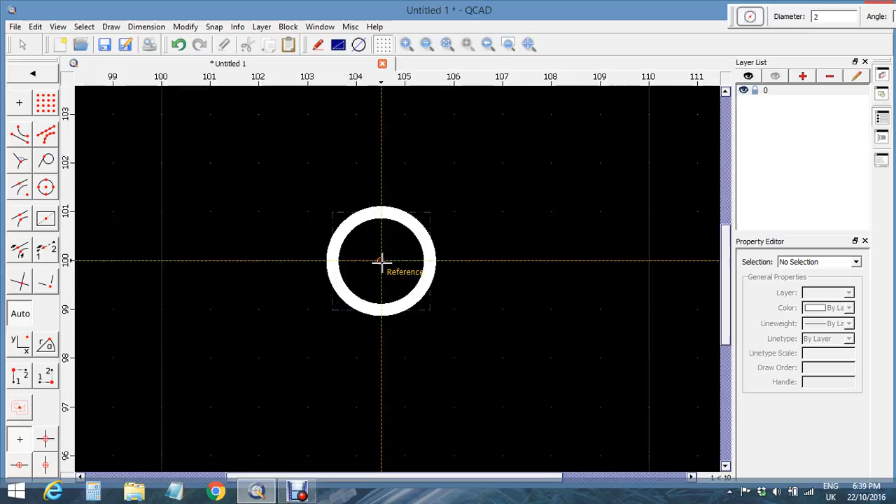Now here's our thing here. Okay, so this being 1104 motor, the spacing is at 9mm apart, so that's 4.5, so that's 4mm and that's 5mm from, say we call this the center, 4.5, so zoom in here and we go to 4.5mm. Okay, and we can do the same here if we want. 1, 2, 3, 4.5. It's going to be somewhere around here, about there.

Okay, so let's just double check that. So this button up here on the top left, back button, takes us back to our tools, back to start. Now this is a ruler. We want to measure, and we're not measuring area, these are for measuring area. This is for measuring distances, various ways.

If you hover over one, it'll tell you what it's doing. Okay, and it'll also show, see how it says here, distance to entity. That means you can just press I and N on your keyboard and it'll take you straight to that function, and you don't have to use these tool buttons at all. I'll use them so that you know where they are if you need them.

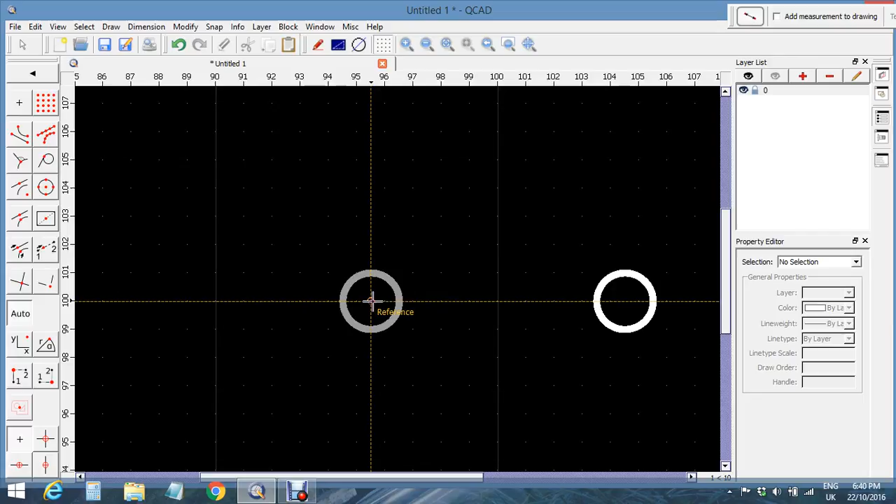Okay, so I've got 9mm between those two, so that's fine. Now I need 2 more holes up and down. I can either draw new ones, or I can show you a technique that we'll use later, so I might as well do it now.

I'm going to select these two. To select something, see how when I hover the mouse near that circle it goes darker. That means if I left click it will become selected. You have to select an item or an object to be able to move it or do something with it, or copy it or rotate it.

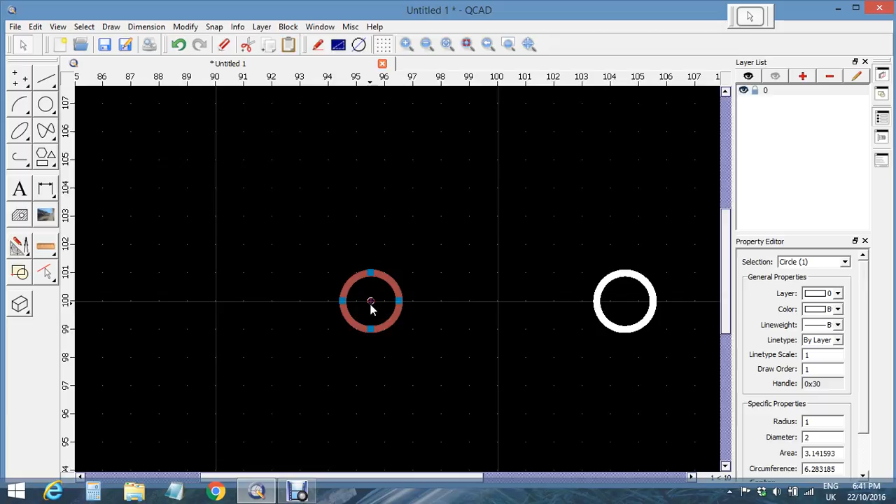Now I want to select both these and rotate them 90 degrees and put them back up here, so we've got 4 motor holes. Now I can select it by dragging, left click and drag. I can select them both, is one method. Now I want to do something with these two.

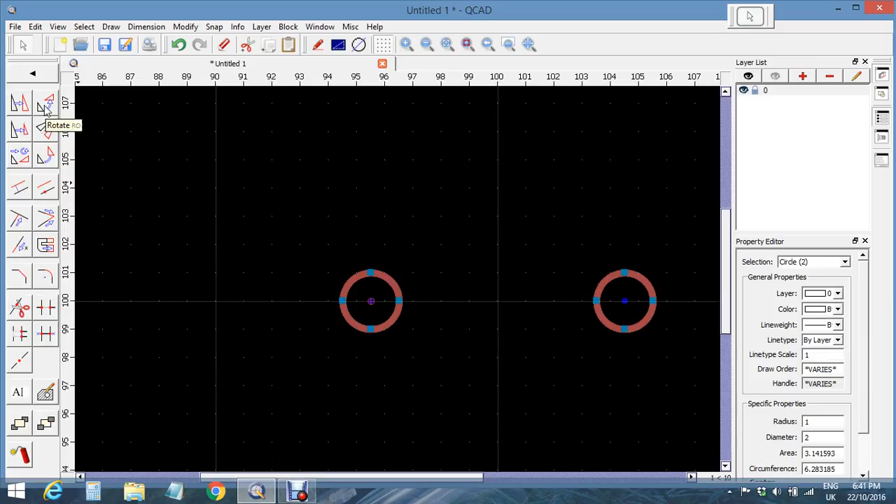I want to modify, they call it modification tools. So we go to modification tools and I want to rotate these. Now I could type RO into the keyboard, or I can do it the slow way here. Rotate is used a lot, so need to get a handle on it.

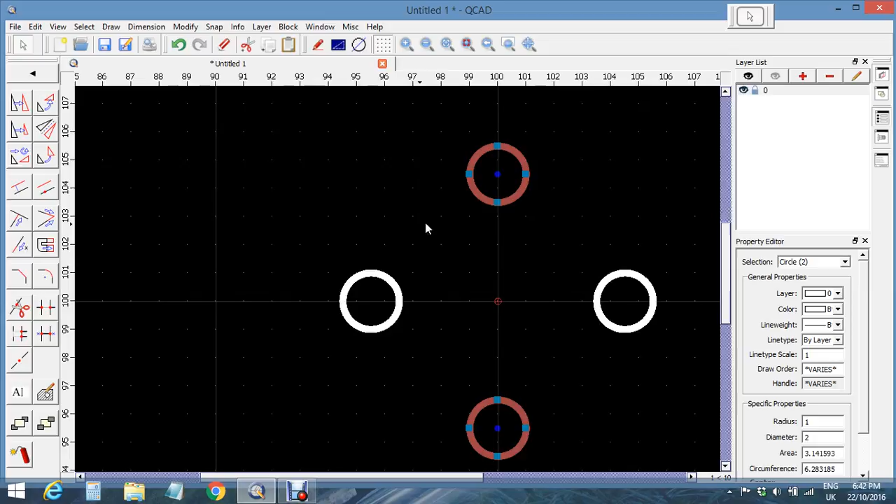It's asking me what point do I want to rotate these two selected items, and I'm going to select here. So we rotate them around there. Now the angle is 90 degrees counterclockwise for a positive angle, and I want to keep the original, not delete the original. Okay, I'll show you what happens. So we've kept the original and we've got the new rotated. So now we've got actually the holes for the motor.

Now I need another circle, so we go back on the toolbar and select circle. We want a circle of diameter around 4 mil. I drop that in the middle by left clicking. Now this will keep dropping circles everywhere as I left click.

To get out of this mode, you right click and it'll kill that mode. I can get rid of those two circles by using undo. So if you get into any drawing mode, you can usually right click to exit, or unselect with a left click. I select with a left click, unselect with a left click. If I'm in a mode like circle, to get back to normal drawing, you have to right click and then you're free of it.

If I wanted to change that center hole, in the property editor I could make it whatever size I want, say 3.8, and then click or enter and it'll change that circle. It'll give you the coordinates of the center point, and you can change them and it'll move the circle. You can do that with a line or anything.

Okay, so I just moved it 10 to the left. Now I can undo that and put it back.

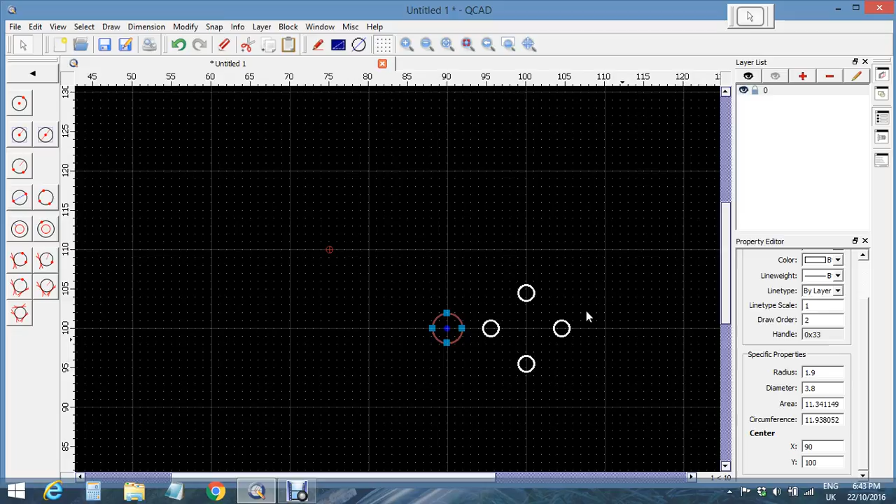There's our motor base. Now you can see that the arm would be at 45 degrees, which is correct, but I want to draw the arm vertical so that I can get it symmetrical. It's easier to draw vertical, so I select all that.

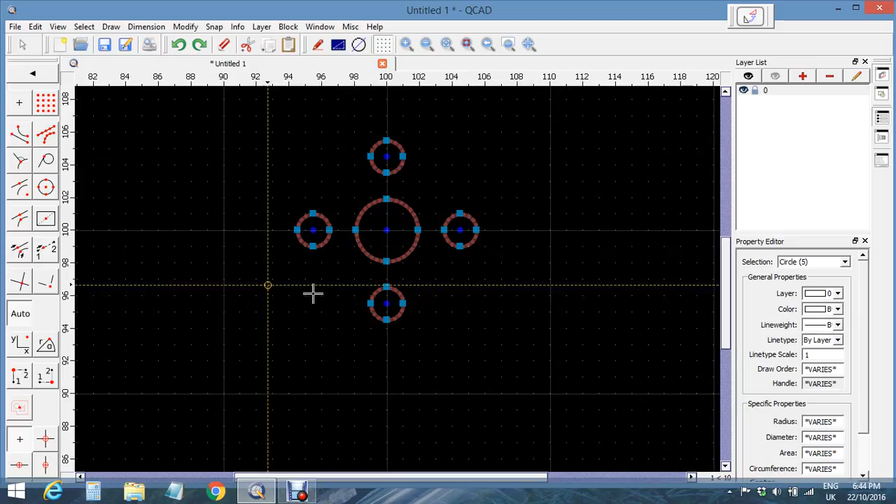And we rotate again. So we go to our modification tools, rotate button. Now the axis I want to rotate it around is right in the middle, so I click there and I want to do 45 degrees.

Click OK, and I made a mistake there in that I should have deleted the original, so we go back and we do it again. Rotate 45, but we delete the original, otherwise it gets cluttered.

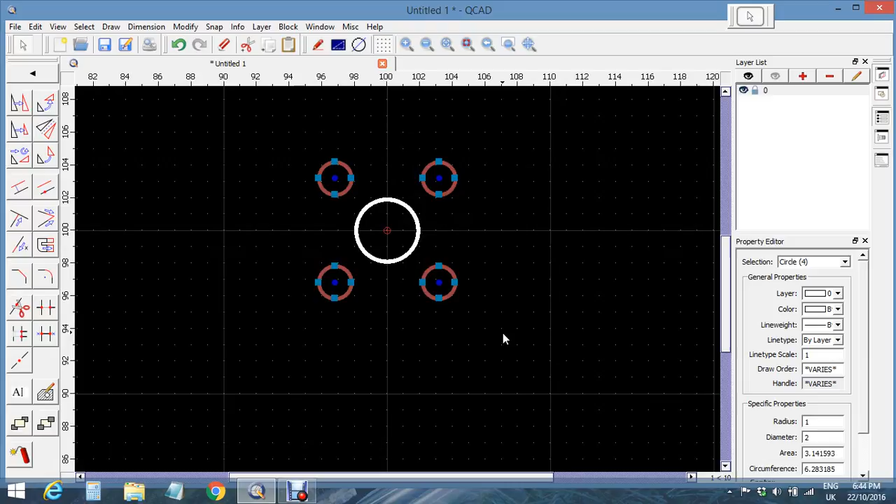Okay, now what width are we going to make the arms? Let's say 8 mil wide for the arms, 8 and 3 mil thick.

Go to the back button because I want to draw a line. You can do arcs, circles, ellipses, squiggly lines, spline tools it's called. Text, if you want to put a text box. I don't know what these do yet.

That's the modification tool. That's to create a block. I don't do that much, but you can. I'll show you how that works now, otherwise I'll forget. It's probably easier when you're starting to make blocks.

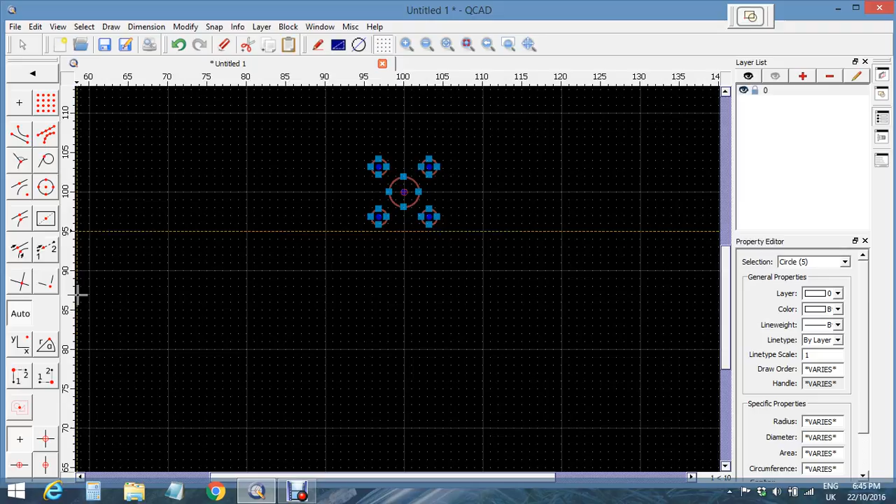We want to make this as one entity instead of 5 different things so that we can move it around later. So we create the block now. The next click that I do is where we handle this block. How do we grab it and move it? I want it to be in the center, so I'll do that, and it's going to be called block 1, or I could call it engine mount or whatever I want, and go OK.

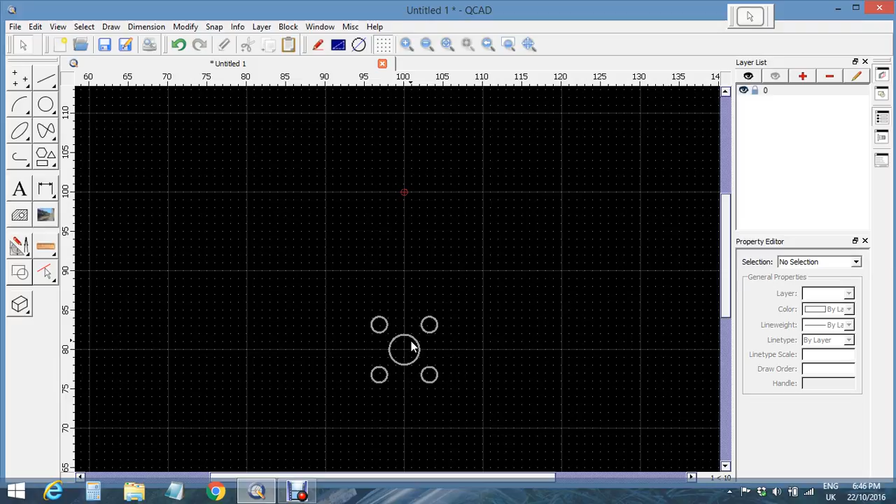So that is now one entity, and I can drag that around and drop it wherever I want, or I can spin it, oops, left click to drop it, whatever we like. So it just makes manipulation of groups of elements a lot easier.

Now we can undo that by selecting it, modify, explode. Okay, and we're back to where we started. Now it's all individual bits.

Doing block selections or making into a block like that is good also for making sure that none of the elements become disoriented or out of spec with the others, like moved or something.

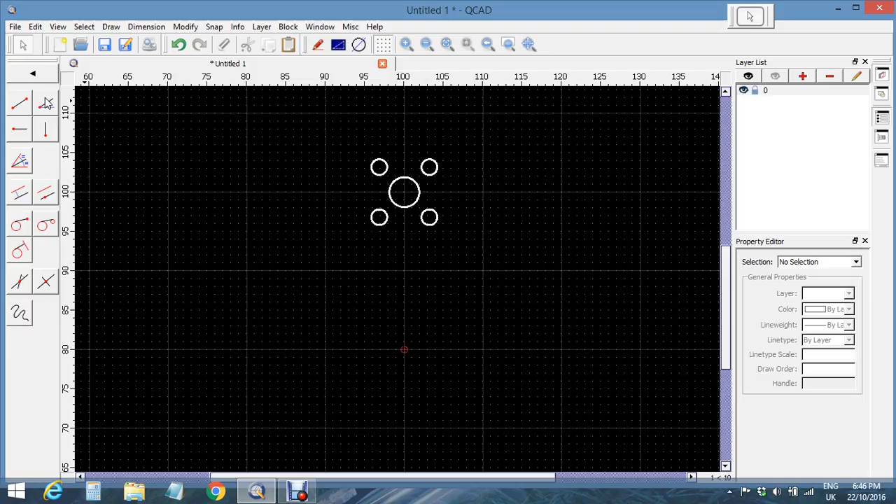Okay, now we're going to draw some arm sides. This is a line tool, and it's asking me how I want to draw this line. Is it a line from 2 points? Yes it is. So we're going to make it 8mm wide, so we say start here, and I'm starting at the top and working down. Now I did my first click to start it and a second click, and now I've got this line hanging off here.

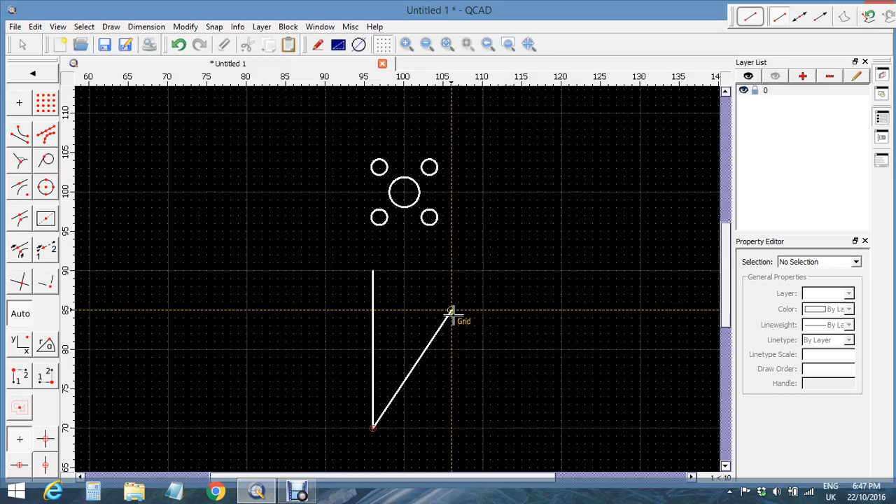You have to get rid of that by right clicking. Okay, now I can do another line. So a left mouse click to start and a left mouse click to finish and a right click. Now I'm still in line drawing mode, so it assumes I want to keep drawing until I press the right mouse button. So we click the right mouse button and we're out of there.

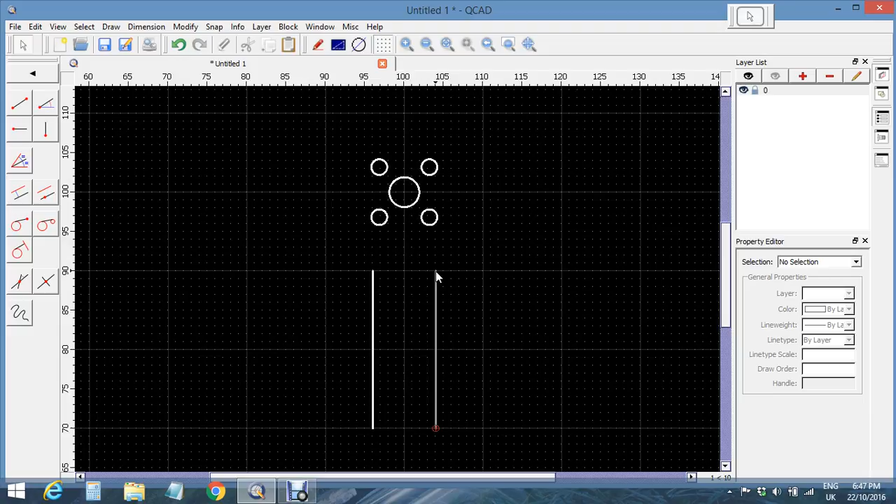Now the reason I started these lines from the top and down is so that I can change the length of them later, and this end will stay here and this end will extend. If I'd started at the bottom, when I try to make the arm longer, this end will shoot up.

I'll show you. Total length is 20. Say we decide later we want it 30, okay? I'll do that and you'll see the extra length comes out the bottom instead of the top. So let's undo that.

It gives you the start and end points, so you can also manipulate a line by just typing in different values here, and your length obviously, and your angle. That's 270 from here, from there's 0, so that's 90, 180, 270.

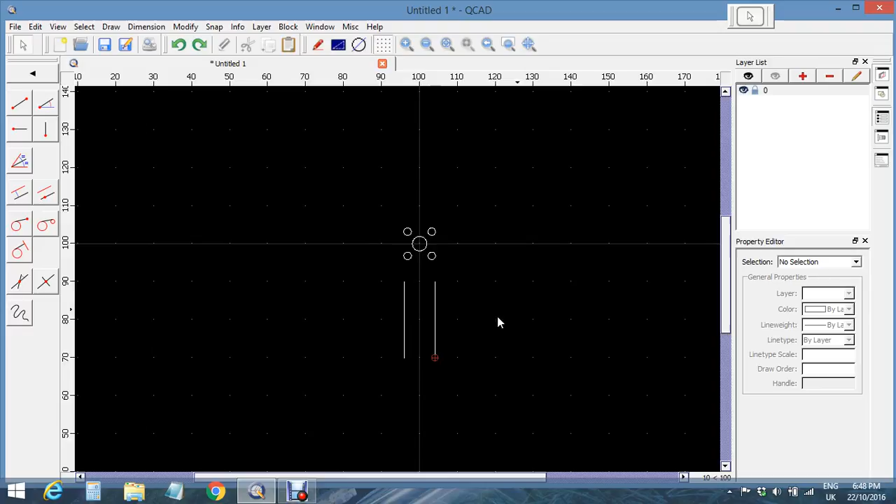Okay, I haven't got a timer going, so I've got no idea how long this is taking, but anyway, I don't want it to drag out, but I've got to go over the basics, I suppose.

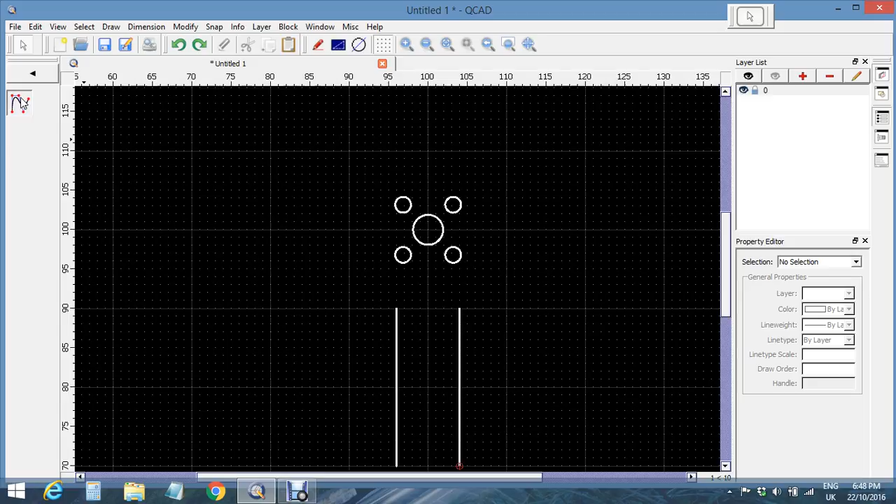So next I want to put something around here, so this is where I use the spline tool. There's only one available, and I'm just going to draw half of it because that's easier than doing the whole lot.

I'm just putting a few random dots around here, not too many. The less you can use and get away with, the better.

But now to manipulate that line, I select it, and then I can drag these little blue boxes around to put it wherever I want to, and it sort of develops curves like that.

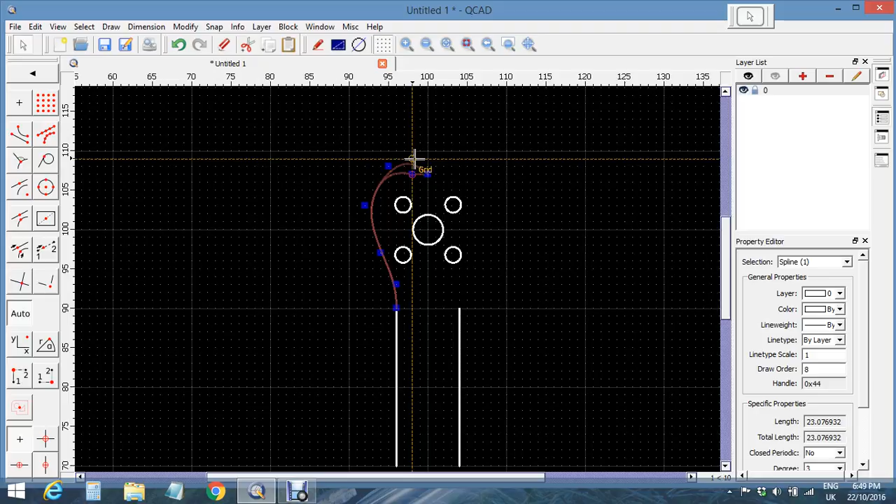So to move one of these boxes, I hover over till I get that white outline on it, then I left click and drag. Once I've got a handle on it, I can let go of the mouse and just put it wherever I want to put it with another left mouse click.

Now I've got no idea what's going on here with the motor, so it'd be nice to have an outline of the motor so we know how big to make this and what shape and where we're going.

So over here at the top right hand side we can add a layer, so we just hit that plus button and we have a layer, and I'm going to call it motor, and I'll set the colour to dark yellow.

Okay, now if I highlight motor, I'll be on the motor layer. I can turn the layer on and off with that eye button. If I want to draw here on the 0 layer, which is the layer that's used to cut the frame, click on there.

So I want to draw a motor, so oops, what did I do? Okay, there we go back.

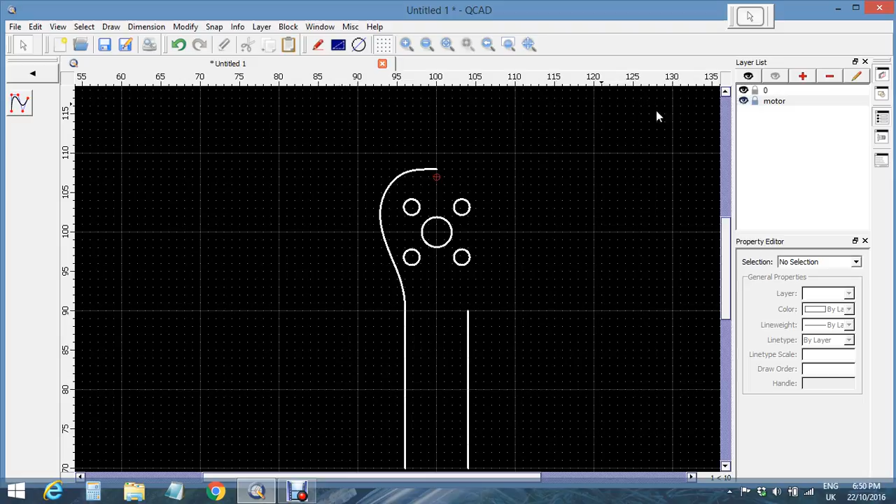We want to draw a circle. I think the 1104 is 14mm diameter, so I'm going to drop that on there and right click to get out of that.

Now we can turn that motor on and off. You can have different layers to help with the drawing.

So we want at least 2mm past the motor and something that's roughly round, and we need a bit of meat out here.

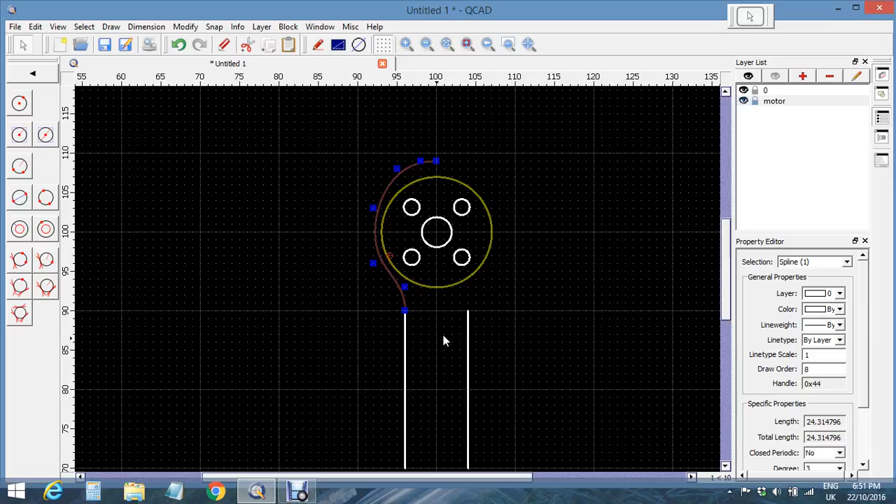I want to move this line down, both these lines down. So how to move a line, how to modify a line: if you hover over the little blue end and grab hold of it, you can move it around wherever you want, change the length.

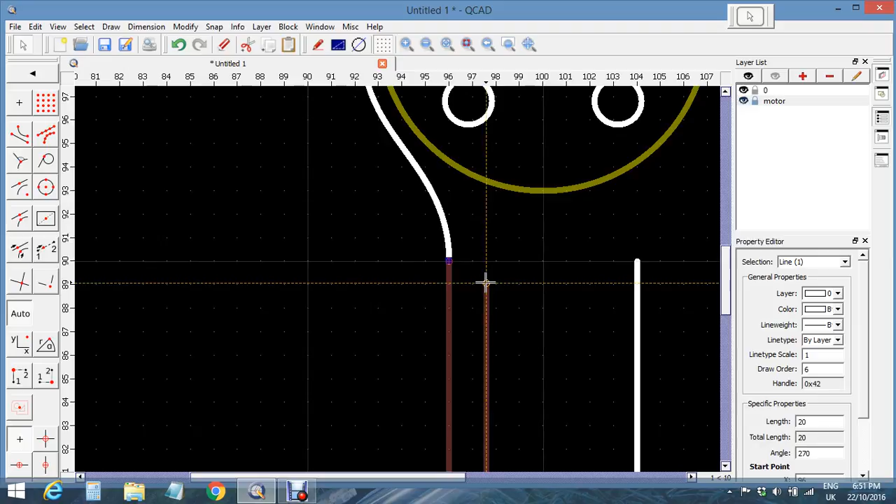Or the other way is you click anywhere on it, you hit the left button and move. Now I've got the whole line intact with its original length, and we'll just bring it down to say here. And we'll do the same for this.

So this will just give a much better taper. I want that around there, it's not... I've lost the selection.

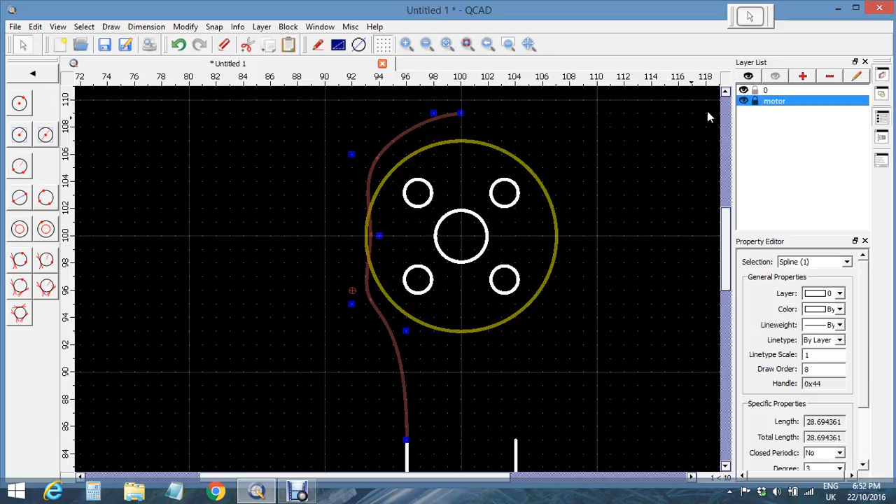I'm gonna hide the motor. I want a bit of meat around through here because this is a high stressed area when you crash on the tip. So something like that, say.

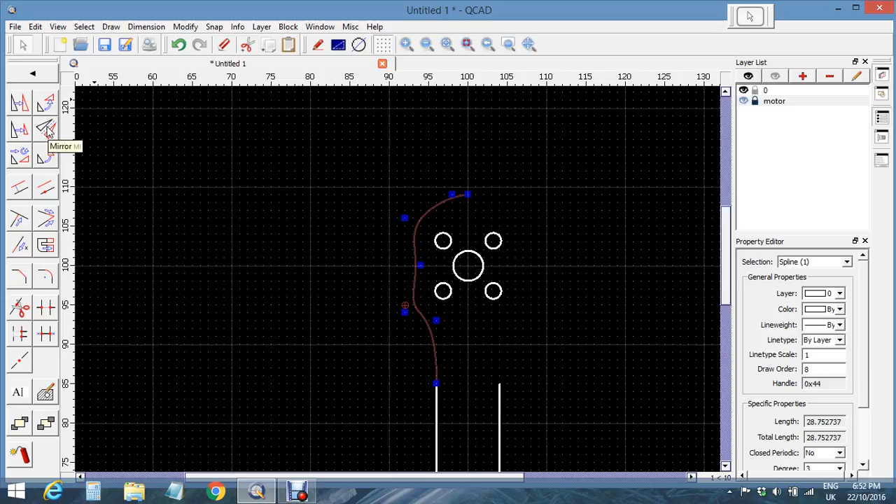So now we do a mirror image. So we go back, modification tools, mirror. Or you can type MI on the keyboard now.

It's asking me for a line, which is the mirror, where the axis for the mirror. So I'm going to, you can see how that works, perhaps. I want it mirrored vertically, so we do that and we keep the original.

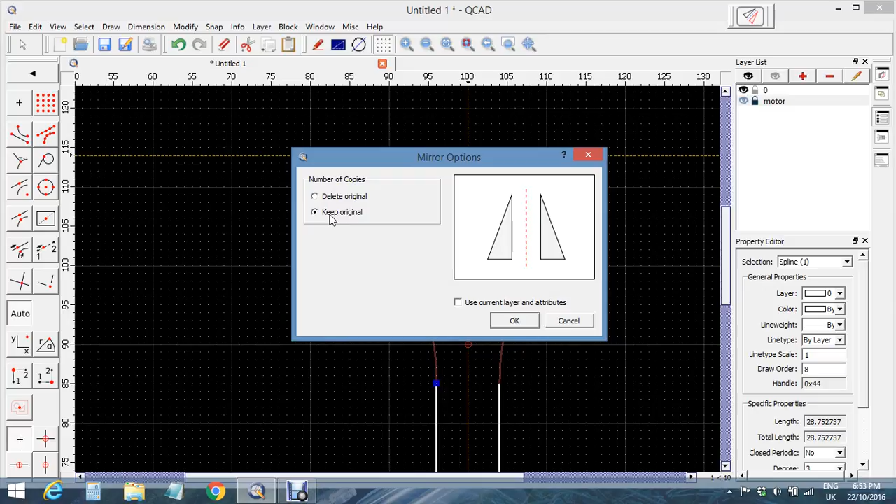So now we've got our, if you didn't like that shape, you would just delete the right hand side, modify the left, or you can modify them together. If I hold the shift button down on the keyboard and right click this, I can have them both selected at the same time. So if I make changes to one side, I can make changes to the other side.

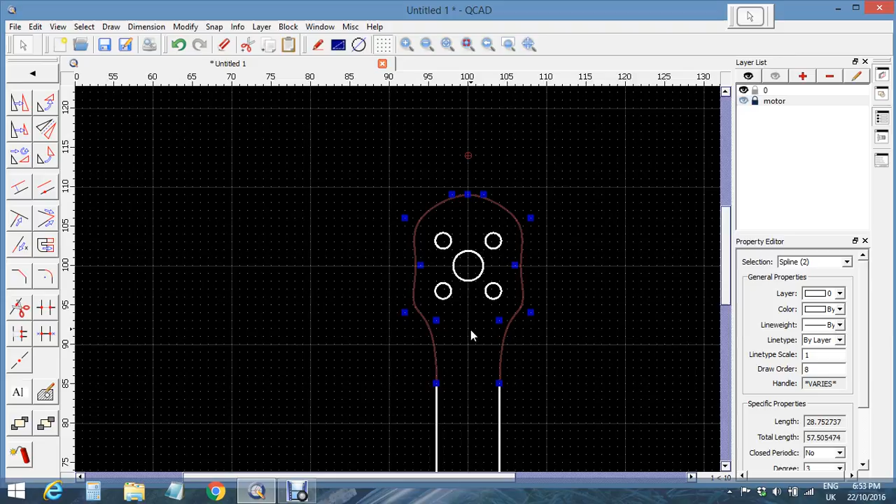If there's going to be lots of changes, I'll just change one side and mirror image it over to the other side. So let's say we're happy with that then.

So we select it and rotate. It doesn't really matter at this stage where we rotate it, but I'll use that, and I want to go 45 degrees, and I want to delete the original.

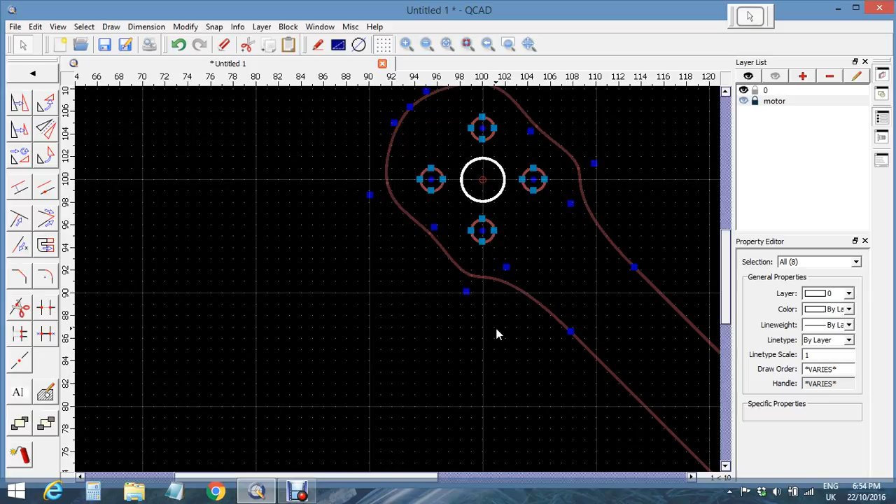So there we have it. Now I want to move it. Oh, I forgot something, let's undo that.

I forgot. Now let's assume that this is going to be the center of the quad, and we want a 135mm quad, and half of 135 is 67.5.

So this is how we set the diagonal measurement, 67.5. So I want to move this. It's a bit hard to explain, I'll show you and then you'll probably understand.

Now see how none of these buttons are coming up on the left hand side? That's because nothing is selected, so I have to select that. Then these buttons come alive. I want to move this, so I'm just going to move it.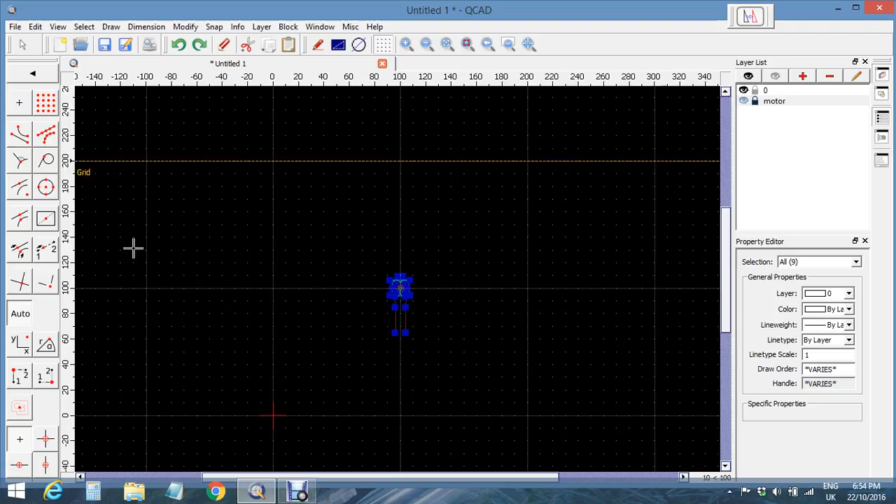And I'm going to grab it by the center hole here because this is where I want to go 67.5 millimeters from what's going to be the center of the frame. So 10, 20, 30, no, I'm not going to make it.

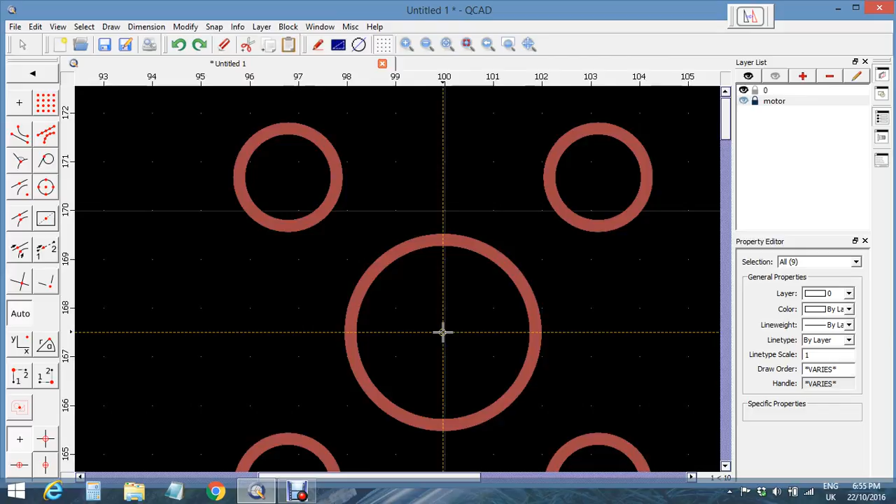That'll be 7, that'll be 70, so a bit under there. Here's our 67, so 67.5 is going to be around here, and as we scroll in we get more finer resolution.

So we want to delete the original and go OK. Now I've made a mistake here. I'm trying to draw on the 0 layer, but I've got the motor layer set up, so I don't know what's going on there.

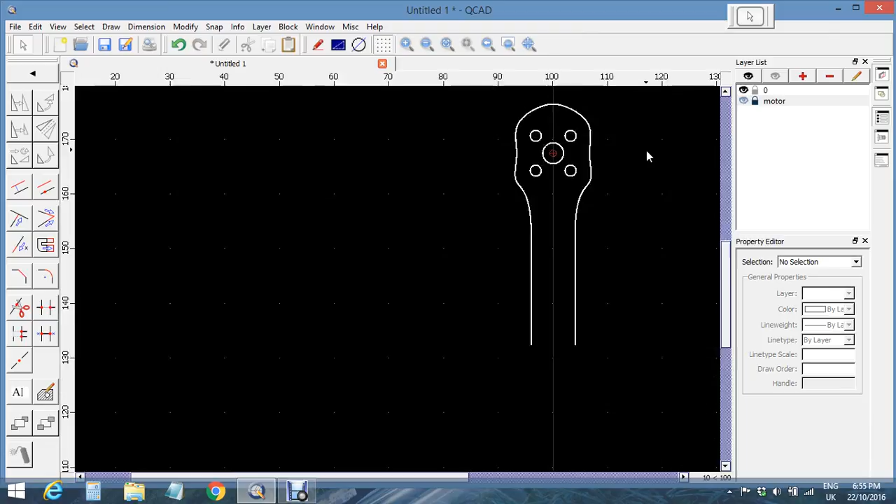Normally this would then become motor.

We've lost our motor. Oh, we've got a little, there it is there. If we turn on the 0 layer, that's there. Okay, no worries.

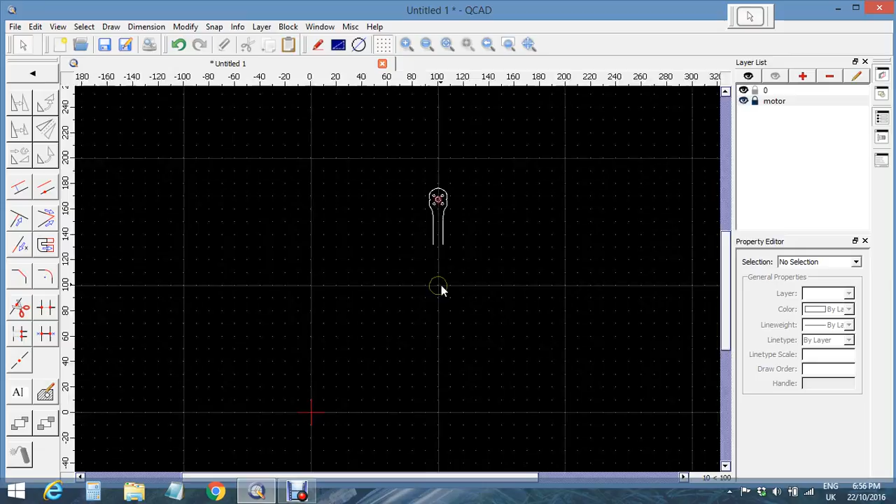I can't select that. Why is that? Yes, I can. Well, I'll just move that out of the road for a while. We'll grab it later.

Sorry for that. Now, this is the center of our frame, right in the middle where this red dot is, because that's the last place I was doing a movement from, here to here, 67.5.

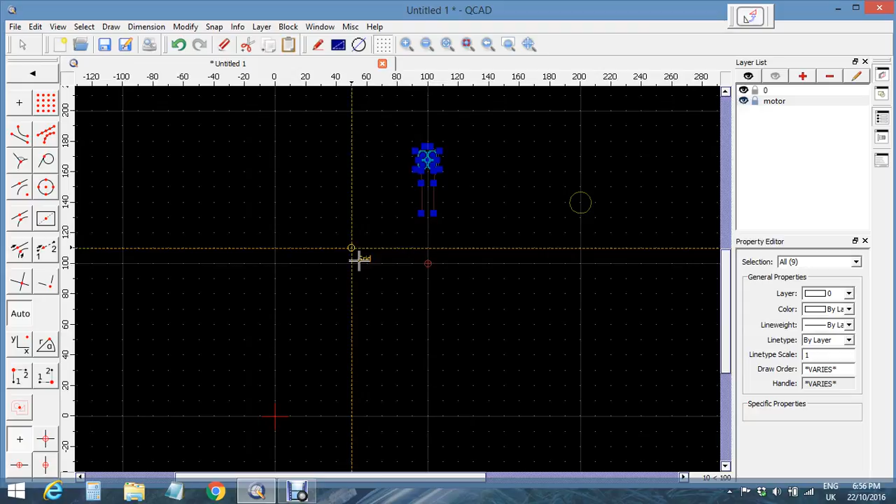Now I'll show you why I did this. I select this and I rotate it 45 degrees around the center of where the quad's center is going to be. We delete the original and we go 45.

Okay, so I've now got one arm. That's the center of the quad where my cursor is.

Now I'm just going to do a rotate. I'm going to rotate around the center of the quad, and it's going to be 90 degrees, and we want to keep the original. Keep original. Okay, let's do it again.

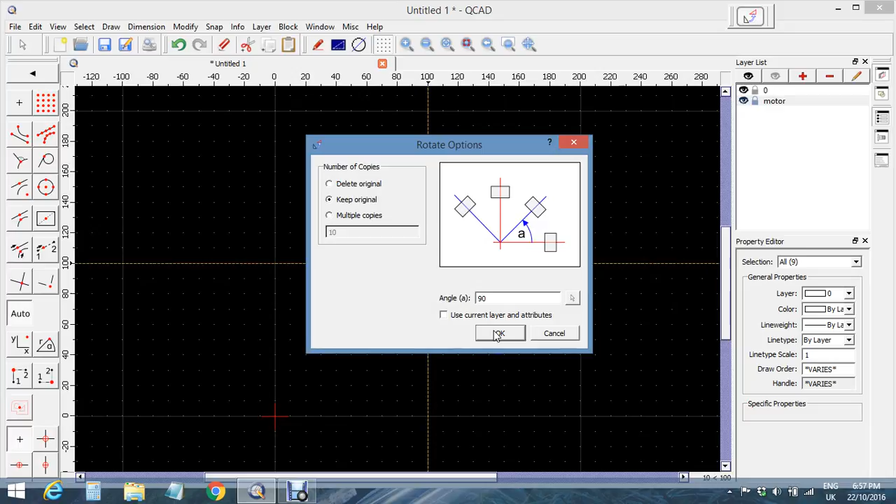Rotate around the center, 90 degrees, keep original. And once more. Okay, so now that's the basic layout of the quad.

This button up here, basically if you're miles away, you get lost, just click on that and it'll bring it up full size.

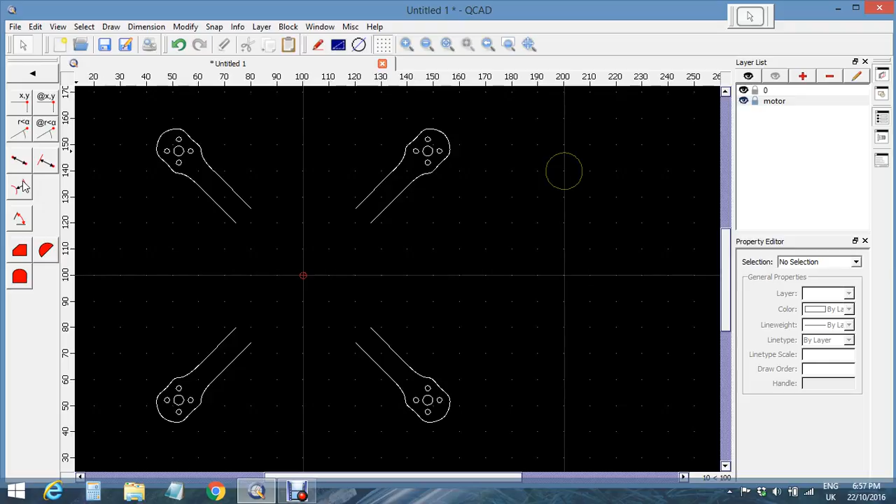So let's check our work here. Ruler, point to point measurement. Now to get this to go inside that end shaft circle, you have to zoom in sufficiently, otherwise it wants to pick up on all other objects.

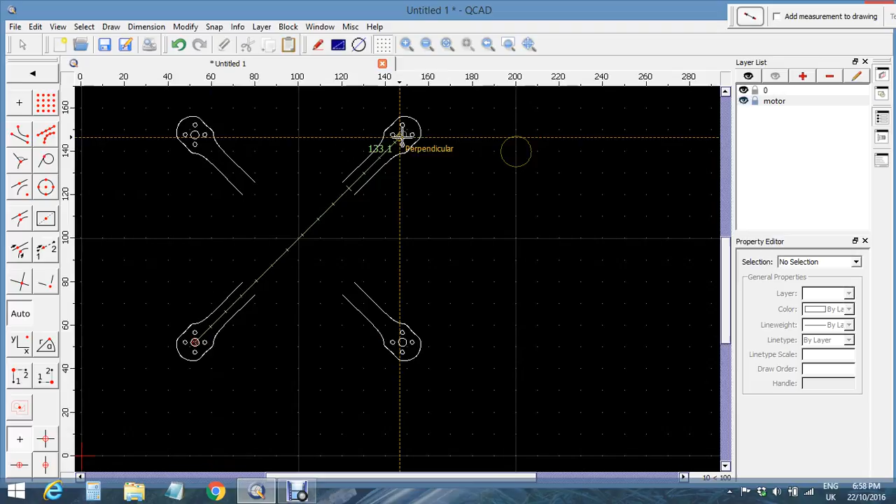So there's our 135mm. And we can be doubly sure of it because it's all rotated. This program, like probably most CAD programs, is extremely accurate. If you rotate and mirror image, it just comes out perfect every time. I like it.

So now if we're getting an idea, I usually just work on one arm and one corner, so I would then join this up to the center here and join this up down to here, and then mirror image or rotate.

Mirror image is good if you're not symmetrical. If it's completely symmetrical, you can rotate.

So I just do 1/4 and mirror image that to that, and then mirror image this quarter and that quarter down to the bottom. So basically all you're doing is drawing 1/4 of the frame.

Now you can make these longer if we're a bit far out, make that 30.

And that's probably all for this tutorial, I think.

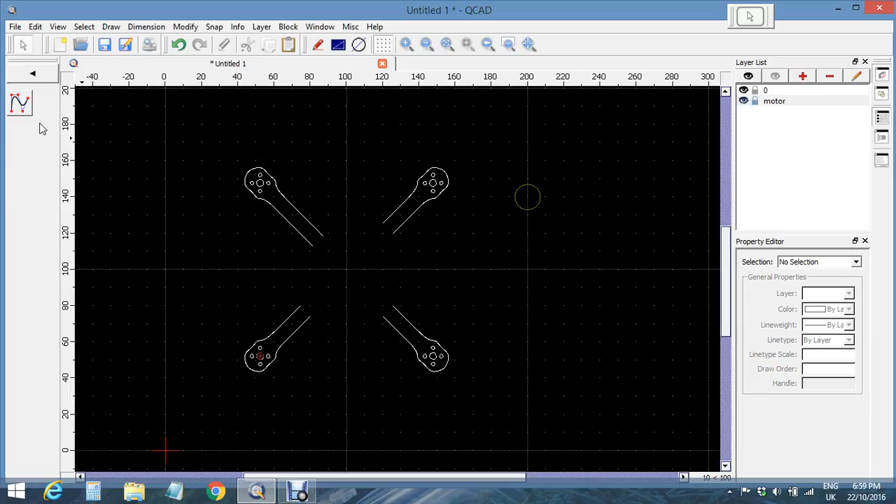I've shown you the squiggly lines, so what I'll probably usually end up doing is, see how I'm on the wrong layer, this is a good time to do this, just tidy this up a bit.

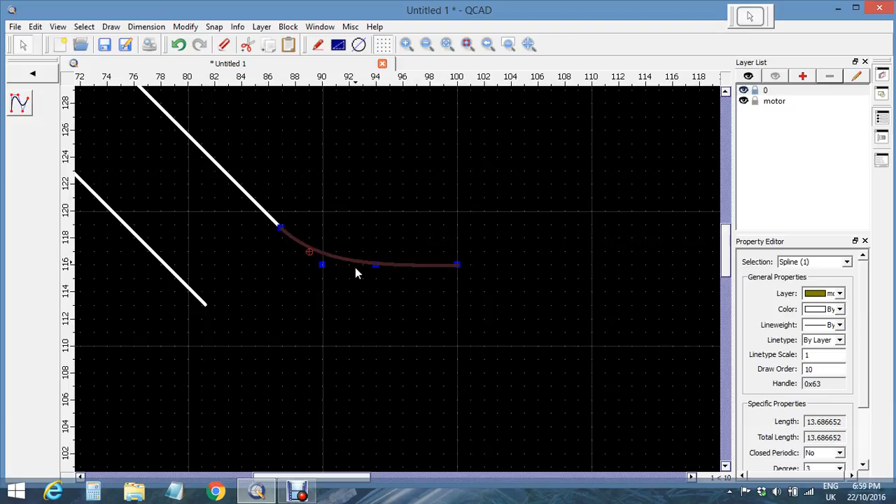Now, I've drawn that on the motor layer. I wanted it on the 0 layer, so all we have to do is click on it, select it, and in here, layer, it shows I'm on the motor layer. I want to go to the 0 layer. Okay, now it's been put on the correct layer.

Now for this bit you might want, I don't know, you might want a different shape perhaps, or a special shape for your battery or something, battery strap to go.

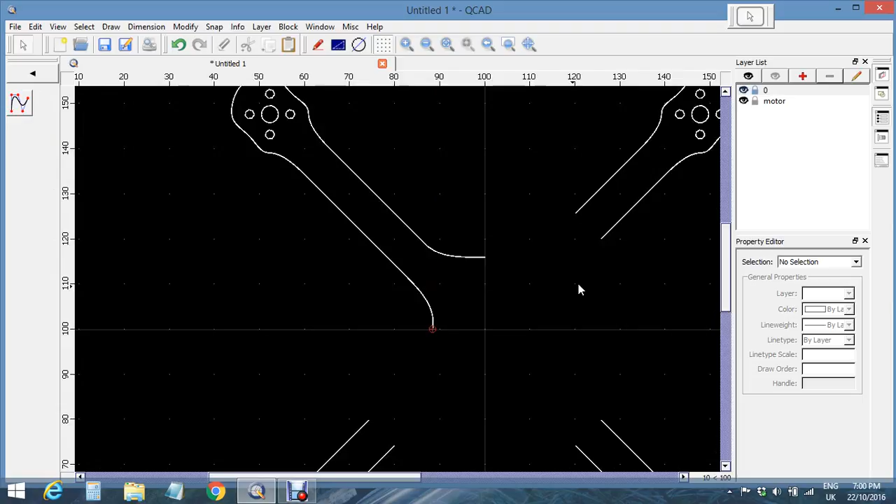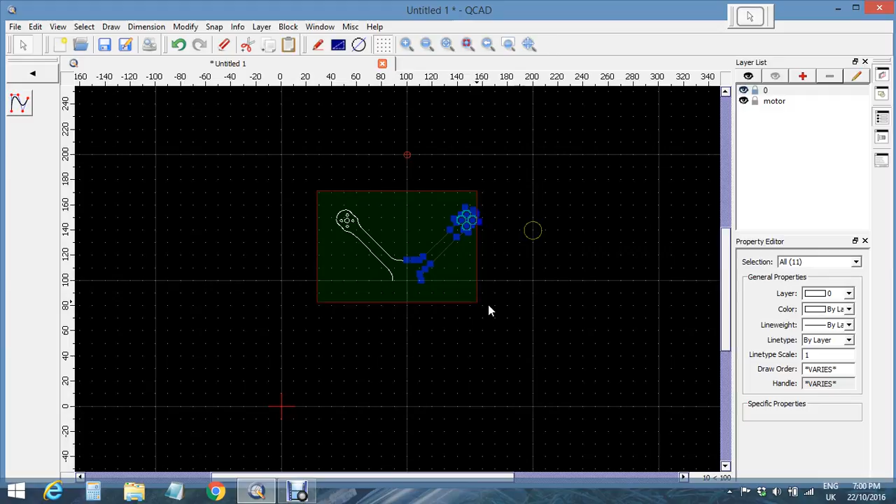So what I'd do there, say I was happy with that, which I doubt I would, but anyway, I can select all that and delete. Hit the delete button, select that, delete, select that, and go mirror image by typing MI. I just typed MI, this is a quicker way. Keep original, okay. Now I can just select the whole lot again, type MI.

Choose our line to do the mirror image. Now notice down underneath we haven't got a proper representation of what we're mirror imaging. Don't worry about that, just do it and it'll appear. And if you don't like what you just did, you can hit the undo button.

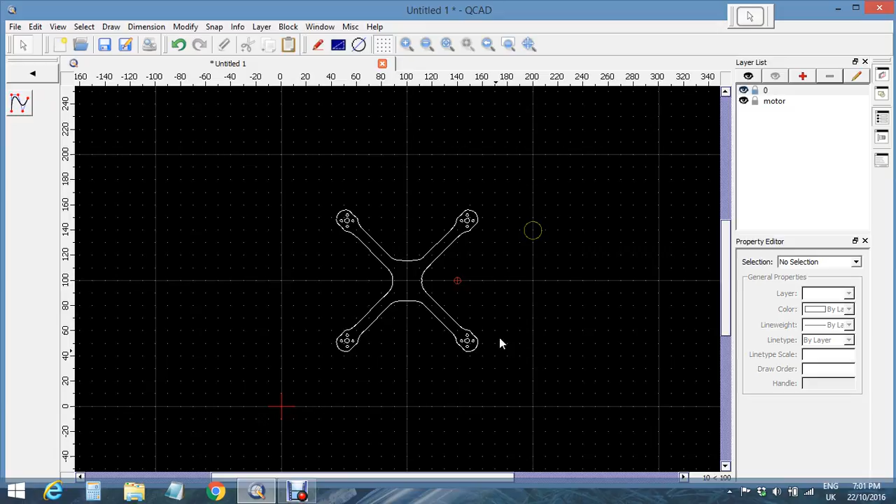So there's our quad. If you wanted to put some holes in for your flight controller, 3mm holes, and say it's a Pico, that's going to be nice and easy because they're on 20mm apart. And Bob's your uncle.

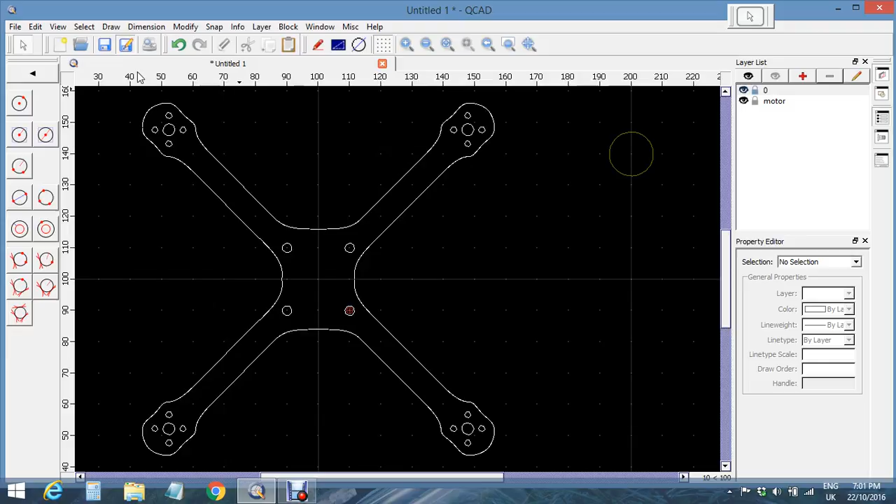You save it. You should be saving all the time. You'll soon do that if you lose some stuff. And if you're going to do radical changes, you can save it as something else and call it 1A, 1B, 1C. I would save that, I don't even know where I am here with this computer. I don't normally use this, but we'll call it 135 millimeter, 1104, 1A. Save. I'll see if I can find it later.

And of course you can put more layers on it, and you can put 4 motors on it. You can draw in flight controllers, you can draw, I usually put in prop circles so you can get an idea of what the props are doing.

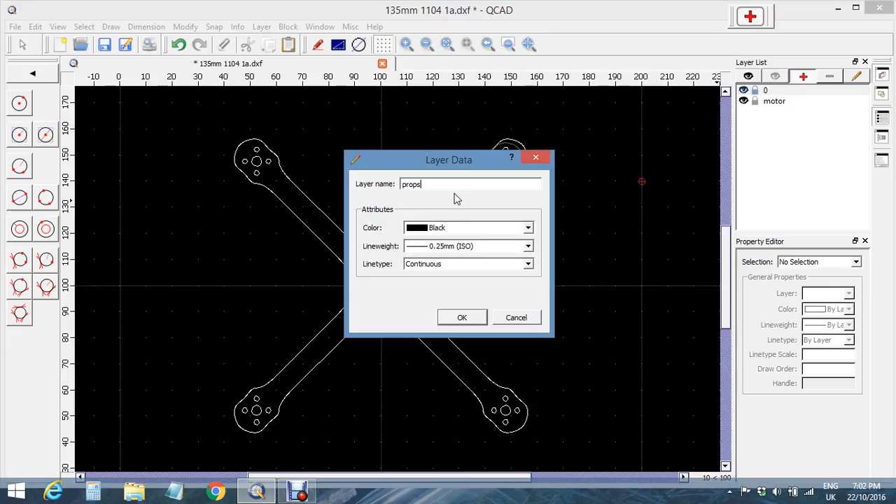And say green, so say we want to know what, so I'm going to be drawing on the prop layer and I want to say a 3-inch prop, say 75, 76 mil. I can just drop that on there. See what it's going to look like.

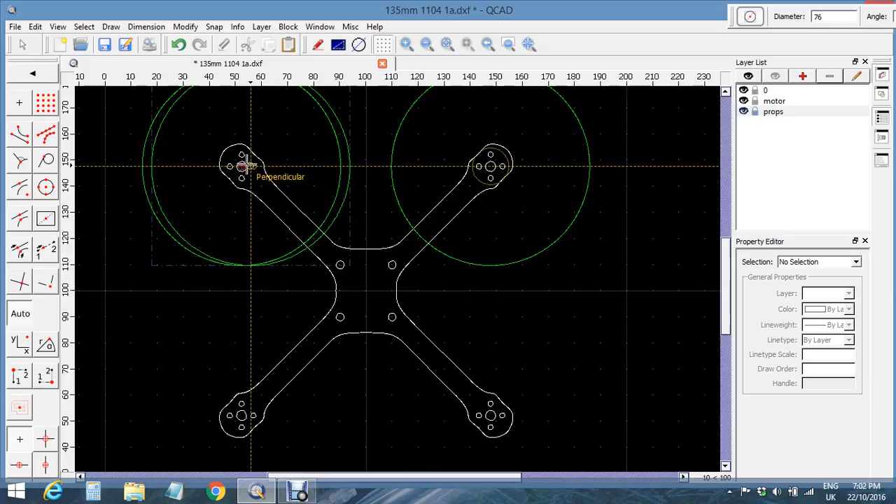There's some faster scrolling tricks too by using your mouse wheel, and the shift or control button will give you, just try it and you'll see what it does. It's very useful. And there's our quad. I hope this is helpful.

Now the final thing is, if you were going to use this to send it to a machine shop to get a CNC place to get it made, they only want one layer. They don't want to be confused by different layers. They don't know what you want cut, so make it easy, and they will reject it if there's more than one layer usually. So what I do is I save it as that, and I call it an SL. I put SL after it just to say single layer.

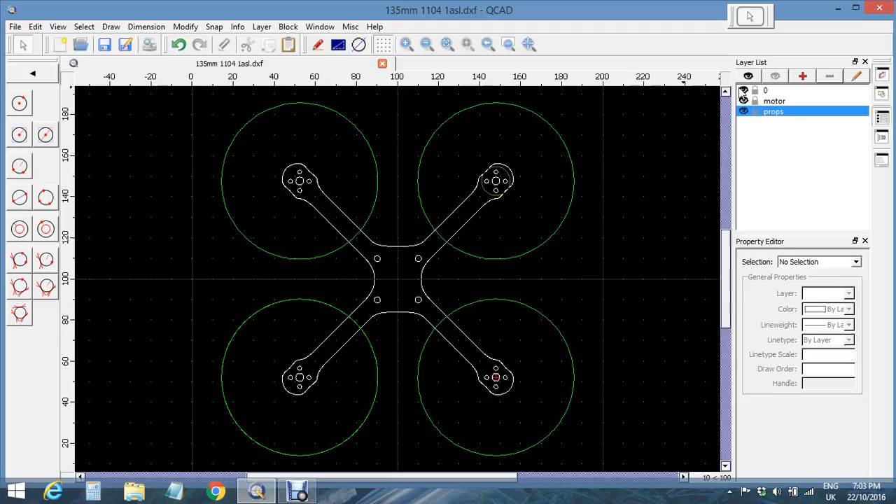Okay, so now this is going to be the single layer, and I think the idea of this program is you can just hit the minus button to delete the layers, but I've had trouble with that. So what I do is I just highlight the layer I've got, zoom out so I make sure I've got everything. I actually delete everything. Now I can delete the props layer. No, I can't. Why not?

Why can't? Oh, because see, I've hit that padlock which locks the layer. So for this purpose I should lock the layer 0, which is the actual quad, and we don't want the props locked, so I should be able to delete it. Oh, it's locked when it's grayed out, is it? Oh, I don't know. There we go, I've got my button up. So yeah, grey it out. I'm having a bit of trouble here. I haven't used this program on this computer before.

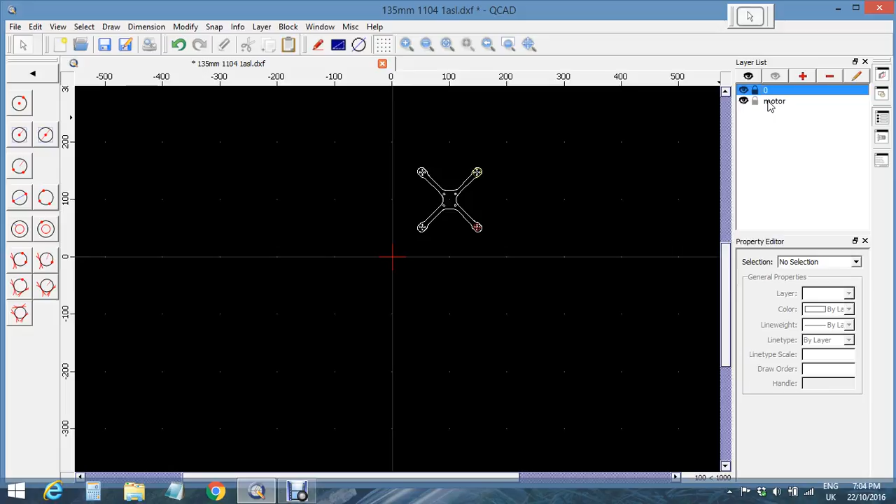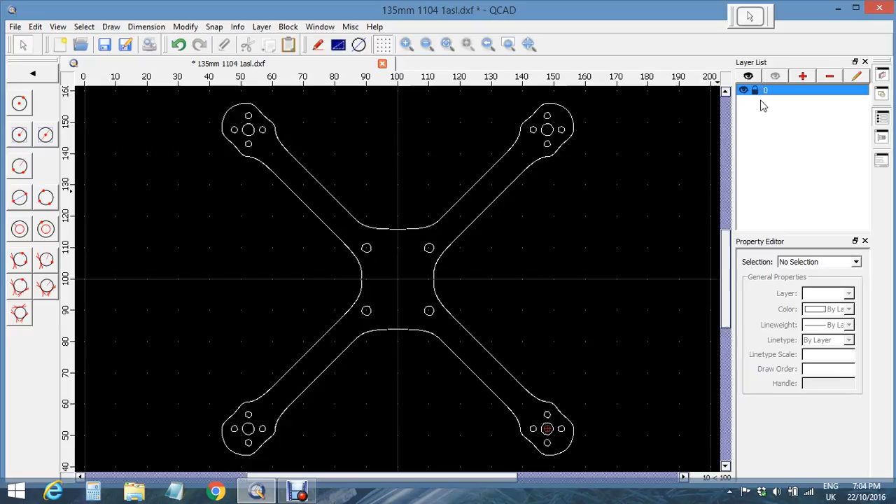So where's our motor? Why can't I see a motor? Oh, there it is there. So let's just hide our layer that we want. We delete that little motor. Now we should be able to delete the... So now we've just got the quad on layer 0. It's locked, so unlock it. That's it. That's the file we send away. That tells the machine where to draw and what to drill and the sizes.

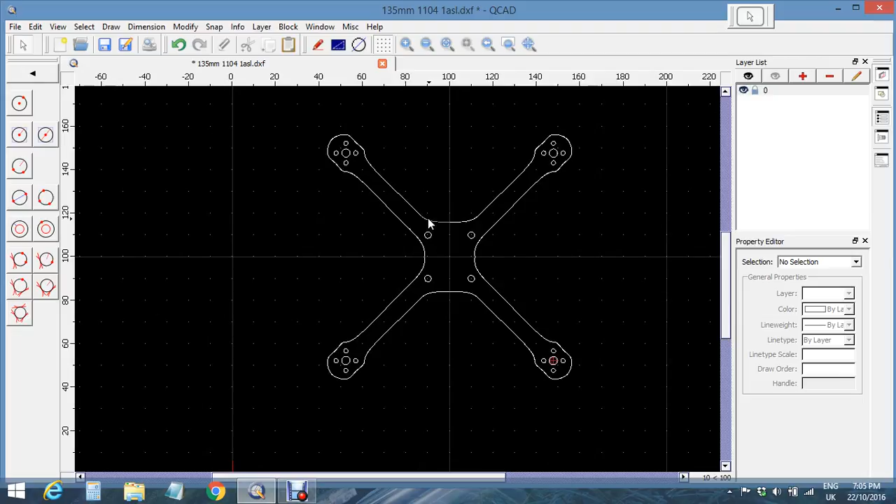Okay. Now you can see that's a bit rough around the sides there. That needs tidying up. It's a good idea to get your before you send the file away, or even as you're drawing, make sure all your lines are actually touching. You select one and you can see if they're exactly joined or not. You'll see 2 discs if they're not directly in line, and you can see that there's a bit of a slight few degrees angle there. I could square that up nicely too.

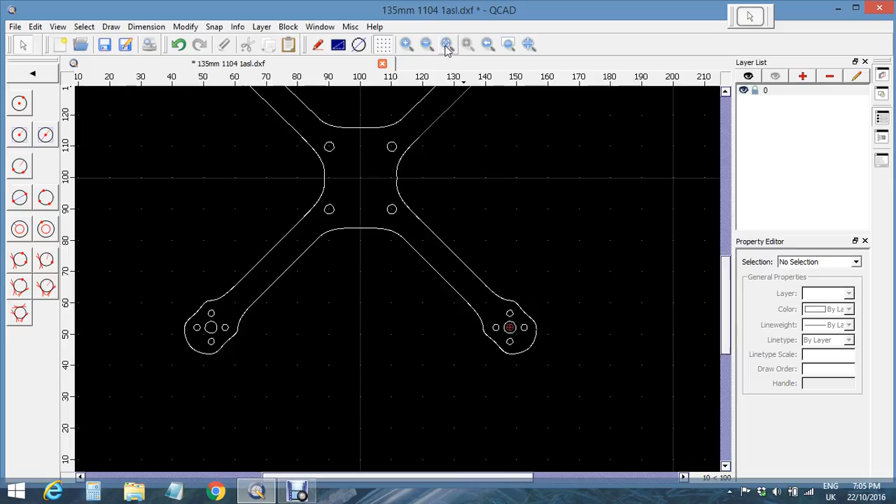That's it, save it. You send that file off and you get your frame made. Okay, catch you later. Bye.